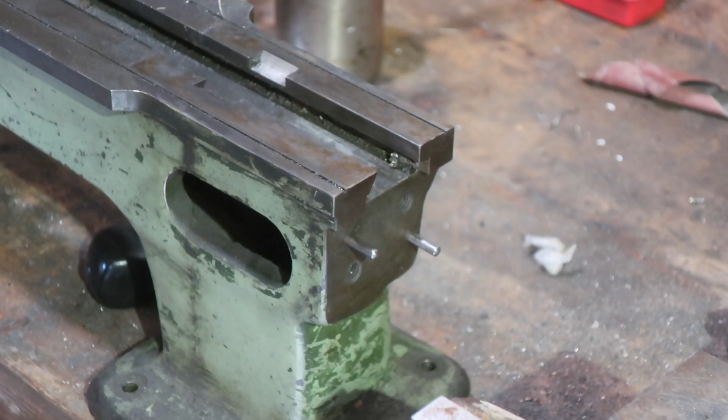Right, back to working on the little Lorch lathe. This is the headstock end. So we're looking at the back of the lathe. It's, well, it's in a bit of a state, but it needs a good scrape.

The job for the moment is making supports for the lead screw to come out here and on the other end. You'll notice the way that this setup is. There are two 4mm dowel pins and two 6mm holes. Those locate the supports. On this end there's an arm that comes out, it has a piece that comes out from there, and then the threading banjo goes onto here. The other end's a bit more simple. Of course the hole patterns are not the same, so we can't make two identical pieces.

The way that we're going to do this, because I can't pull these pins without massacring them, and they're in the way, we're going to need to punch some holes in a piece of paper to then pick up the rest of the surface in a similar way to making a gasket for the top end of an engine or such like.

We do need a reference surface. We can't use the back end of the casting here. Back end of the casting is not exactly precision. We could possibly use this as a reference surface. It does appear to have been milled, although I would be cagey about using it as any kind of real datum. This surface here on the top of the slideways is obviously a datum, although it's slightly worn at the other end. It's not going to be too much of a problem.

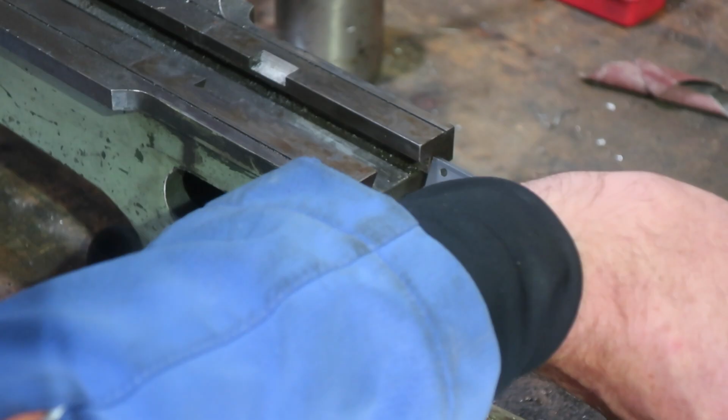So my datum point obviously is going to be this corner here. Now that's a problem. On the other end it's easy because the face on the other end is flush with the end of the bed, but here we're not. We have an offset. We have an offset of how many? We have an offset of 5mm.

So what we're going to do is first off I'm going to measure the distance between these two pins best as I can, and once I've measured that distance we will punch some paper at that distance, and then we'll use it to pick up all of the various reference points. The other end is the same, although I don't think the spacing between these two is going to be the same. That's around 40mm, and this one's around 33. No, okay. So I'm going to need to do this twice.

So first thing is to get a reasonable pickup of the distance between those pins. You can't expect this measurement to be anything particularly coherent because obviously these will be positioned relative to some datum point when they made the casting. Actually, I might try that with a micrometer. I should have it lying around here somewhere. Not there, obviously. Where is my 25 to 50? I know it's around here somewhere. And there it is. It was in the micrometer box, surprisingly enough.

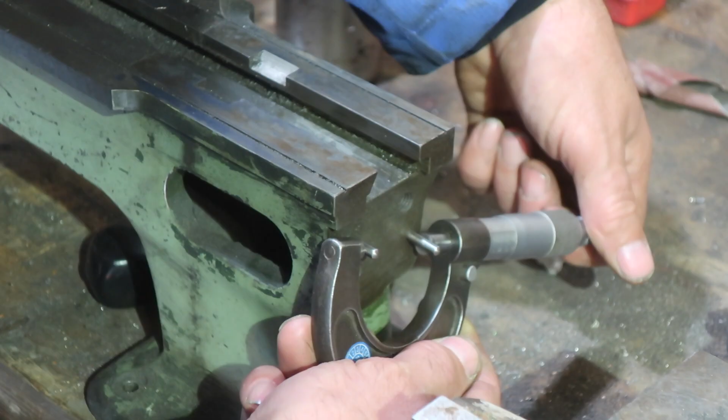So let's come out to 40 and something. 40 and odd. And we'll try and get a reading on that. Get the anvils relatively close. What's the shortest distance, the distance where I can't go any shorter? Actually, no, I don't, do I? I want to definitely be there. And that says 40.22. So 40.2, I think.

Right, markup time. Now we have a piece of paper. I reckon that the distance between the outside of these two pins is 40.2 millimeters. Now 40.2 less the 4 millimeters of the diameter of the pins is 36.2. I've marked a point on my piece of paper. I'm going to mark another point on my piece of paper at 36.2. So we use the, it's the sharpest end, isn't it? Just there. I'm going to centre that one on there, and we're going to put that about there-ish. That should be the hole spacing for those two pins.

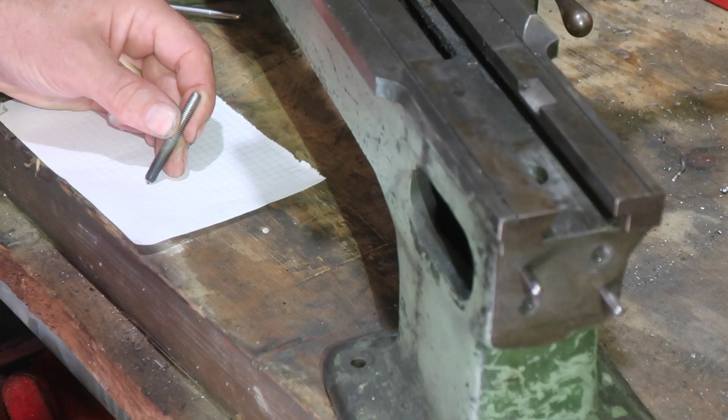So what we do now is we take our little punch, what we have made from a piece of shitty old supermarket 6mm bolt, and we punch. And then we do the same here. Here. And we have two holes. And those two holes should go over two pins. Seven brides for seven brothers. Yes, how about that? Now then, there's a few things that we're going to need from here.

First of all, we need our datum point. Well, we're going to be leaving those on there and being careful not to mess things up too much. They're kind of grubby hands for this job, but there you go. So we're going to mark our datum point. That's the datum. We also need to mark a horizontal reference. Well, for that we can use the top of that milling in the bed, or we can just mark the top of the bed. And the bigger we mark this, the better, because it means that we can more accurately line shit up.

The next thing that we need is the holes. So, keeping stuff relatively in place, we're going to mark our holes with our fingers, like that, and there should be one up there somewhere, like so.

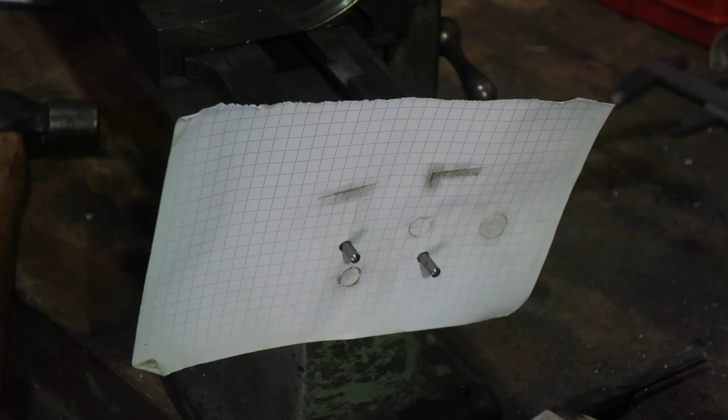And then the last thing is with a piece of 12mm rod clamped in the lead screw nuts, we bring the carriage forwards, clamped in the lead screw nuts, I said. We bring that forward and we mark where the lead screw is. And we have a piece of relative positioning of our holes. And I'm going to stop now because I'm running out of battery, and we'll come back when we're at the computer.

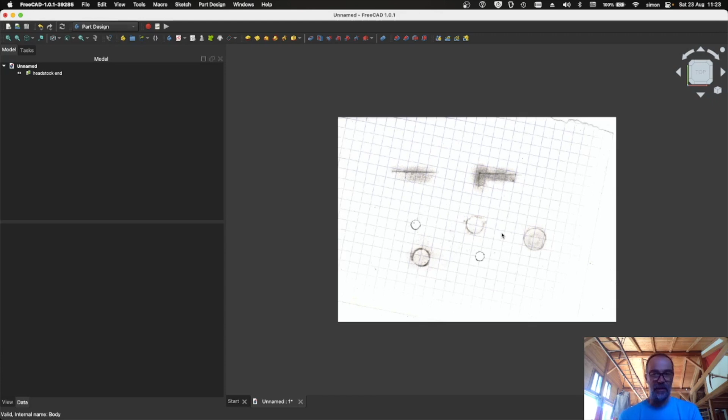Right, well, I'm no OBS whiz, and I'm certainly no FreeCAD whiz, but here we are in FreeCAD. And what we're going to do is we're going to go import. Is that showing there? Oh, it is, good. Okay, right, and there's my headstock end. Bing! So that's just been scanned in. I've not done anything to it. The scanner brings stuff in at 100%. It lets me rotate stuff when I'm scanning, which is quite neat. So I'm relatively close to being square, I think.

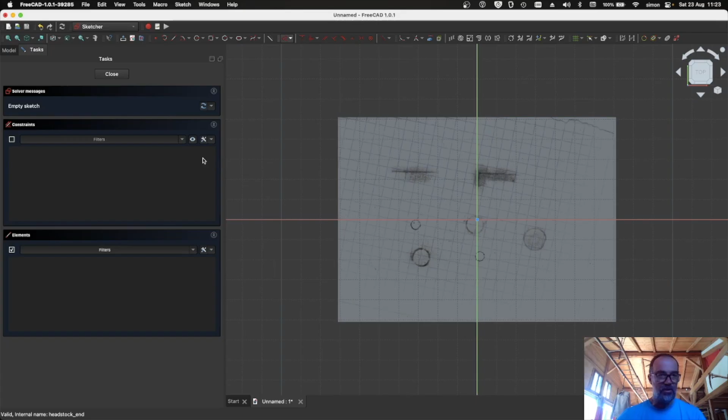What we do now is we create a new body, and in that body we create a sketch, and we add the sketch to the XY plane because that's where we're attached. So yes, select the XY plane, that would be a good idea, wouldn't it? And what we can then do is, while that sketch is open, we go back to model and we go to the data of the scan, and we can position it. Now we look to be relatively close on X. Maybe we want to go about -1 millimeter. That brings us more or less into line.

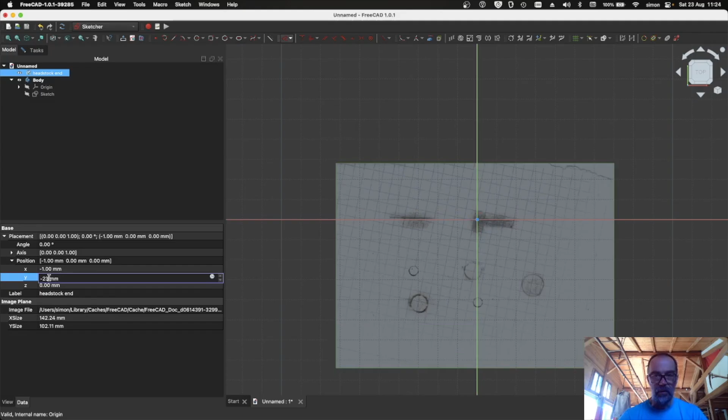And then on Y we want to go minus or plus, probably. No, -20. Let's look at that. Yeah, there we go. -23. Oh, bing bong. How about that? Now you will notice that we're not absolutely square. So what we want to do is rotate by 0.5, a bit more, 0.8, 1.2. That's getting pretty fucking close, isn't it? 1.3 degrees, 1.4 degrees. Yeah, I'd say that's good enough.

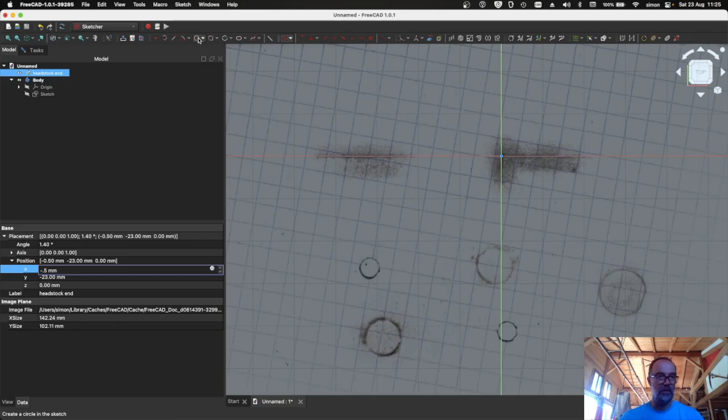And then my X positioning wants to be a little bit more to the right, so I want to go to -0.5 probably. Yeah, okay, there we go. So we now have the origin set on our datum point on the bed. Now that's the front end of the bed, and what we can now do is chuck some circles in place. So we're still in the sketch. Let's add some circles. Bish, bosh, bish, bosh. Now that's added a couple of constraints that we don't want. It's made those tangent to the axis. Don't want those. Go away.

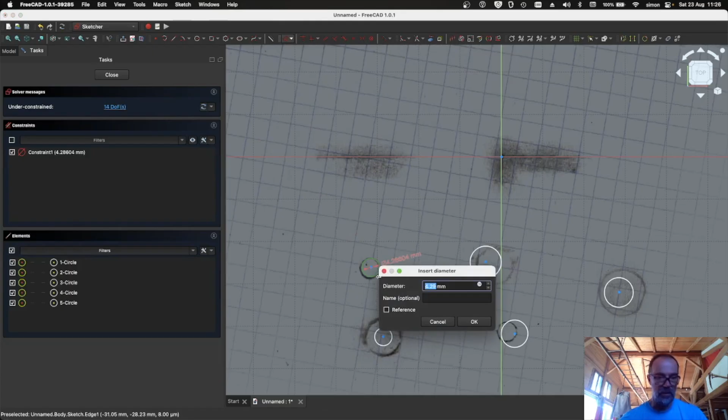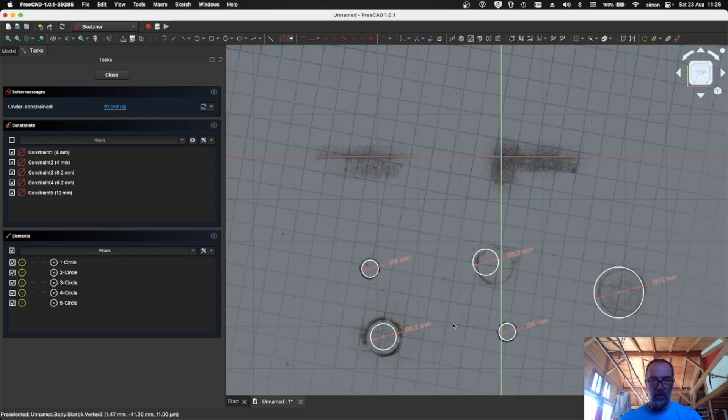We can now go to constraints and we can constrain a diameter. So that one is going to be 4 millimeters. That one is going to be 4 millimeters. That one is going to be 6.2, a clearance hole for a 6mm bolt. And that one, 12. And now we can move stuff around a little bit to fit stuff as far as possible. We'll fit you in the middle of the hole. And we'll fit you in the middle of the hole. And we can zoom in a bit to make sure that we're a bit closer, and fit you in the middle of that hole there.

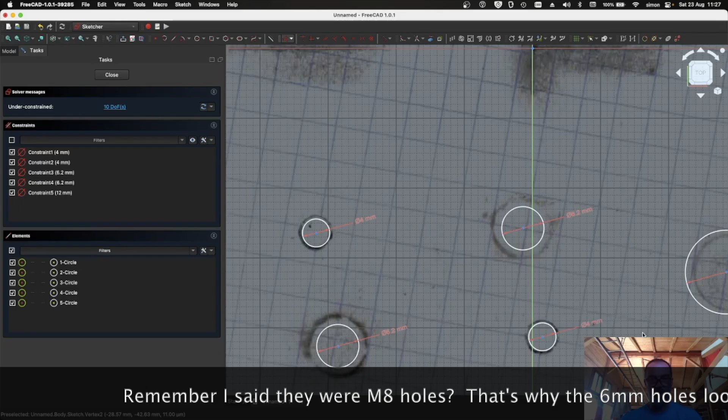Now you'll notice that that hole is actually bigger than 6 millimeters. Why is that bigger than 6 millimeters? That's a good question. Has my scanner fucked up? We can see in a minute. And we can move you. You're 12 millimeters and you're bang on. So that's all good. Right. Quick sanity check. Measure. Can we measure in here? No, we can't. Okay, well, let's just add a dimension constraint between these two pinholes.

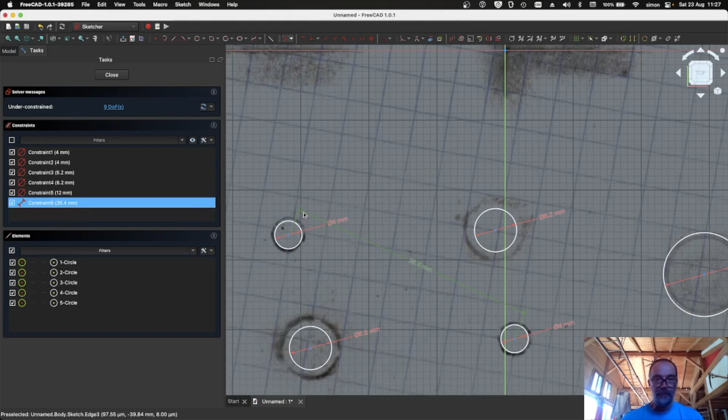30.4 millimeters. That looks about right. Let's make it 30. It was 30.2, wasn't it? There we go. Maybe we might have been slightly off on our measurement. So yeah, 30.4 looks about right. That's good. Oh bugger! So I told you I'm not very good at FreeCAD. Go back into the sketch, you sod. Oh come on, zoom.

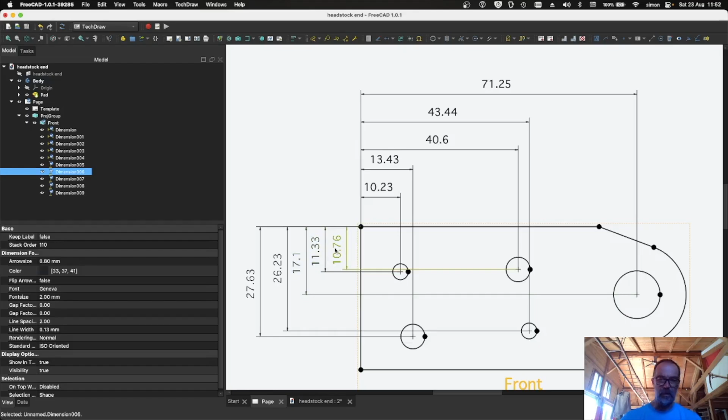Things a bit cleaner, so that it's readable. That must be there like that. That one must be like that. Right, there we go. Dimensions for my part.

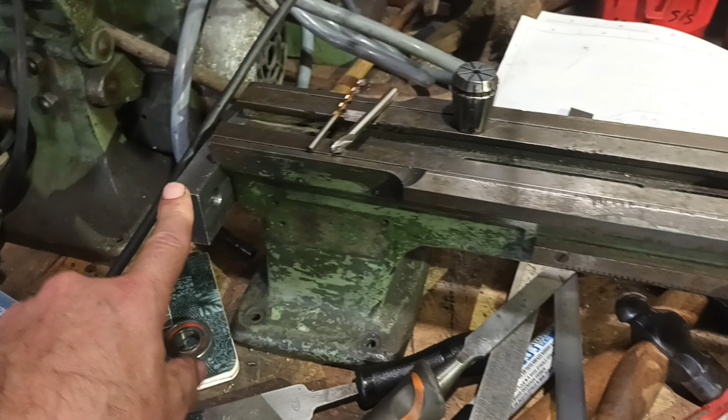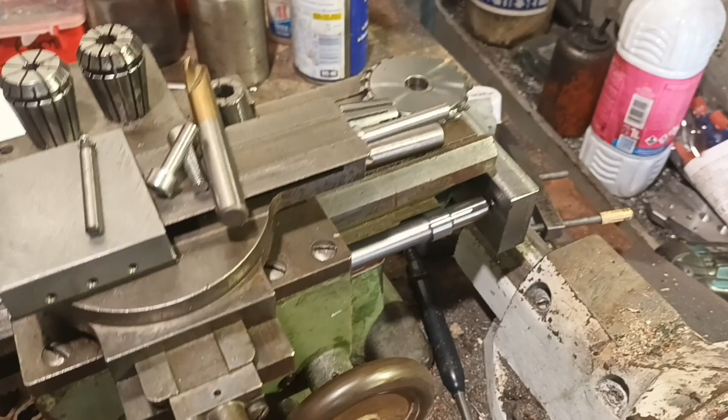Okay then, so here we have, boys and girls, a couple of roughed up end plates. They need a bit more work. This one needs quite a lot of material removing from it, needs the hole making slightly bigger. This one needs the hole making a lot bigger and rounding off, and then having an insert put into it for the banjo to sit on. But they fit, and they meet up with the extension of the lead screw that I've made by putting a 12mm thing in the carriage. So there you go.

That's how I've gone about reverse engineering some stuff that I didn't have.